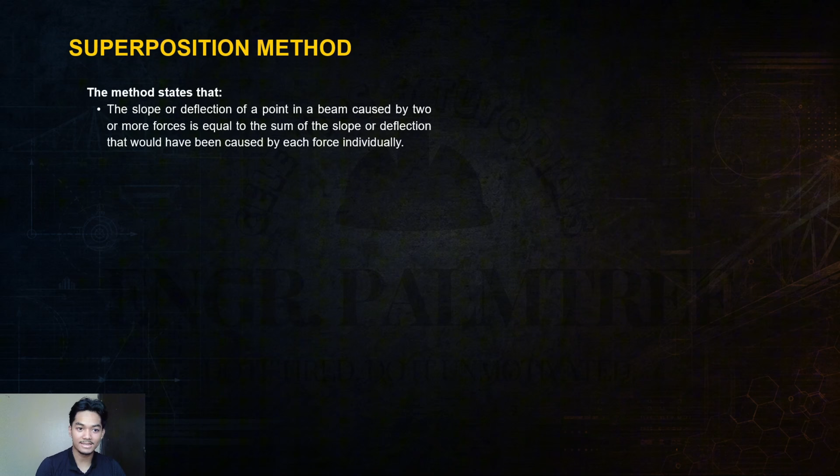So yung superposition method guys, it states that the slope or deflection of a point in a beam caused by two or more forces is equal to the sum of the slope or deflection that would have been caused by each force individually.

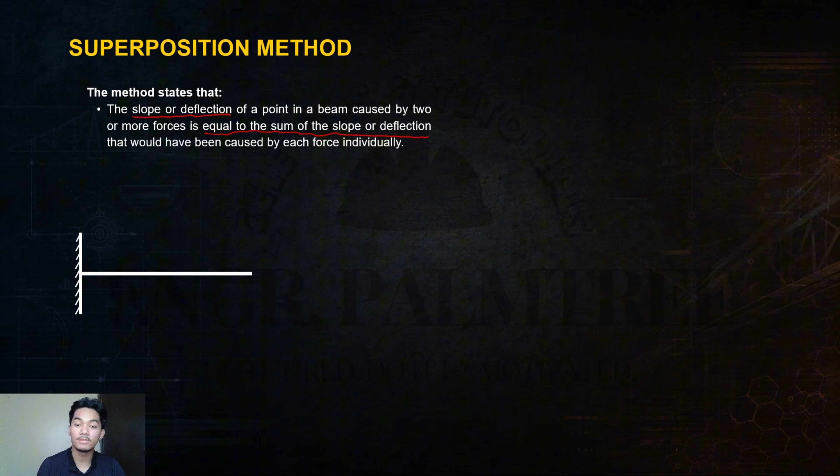So what does this mean? Let's say we have a cantilever beam, tapos there's a distributed load and a point load. Kasi may external forces na tayo, yung beam natin is magde-deflect. So ganito yung deflection guys. Tapos kunwari kukunin natin yung maximum deflection or yung deflection at the free end. Ito yung deflection. Okay? In real life guys, yung deflection ay ang liit lang yan because millimeters yan, pero for discussion purposes, we have to exaggerate it.

So from the superposition method, we can say na yung total deflection nito is just the deflection ng point load at the deflection ng uniformly distributed load. So the slope or deflection of a point in a beam caused by two or more forces is equal to the sum of the slope or deflection that would have been caused by each force individually. Ganyan lang po yung superposition method, guys.

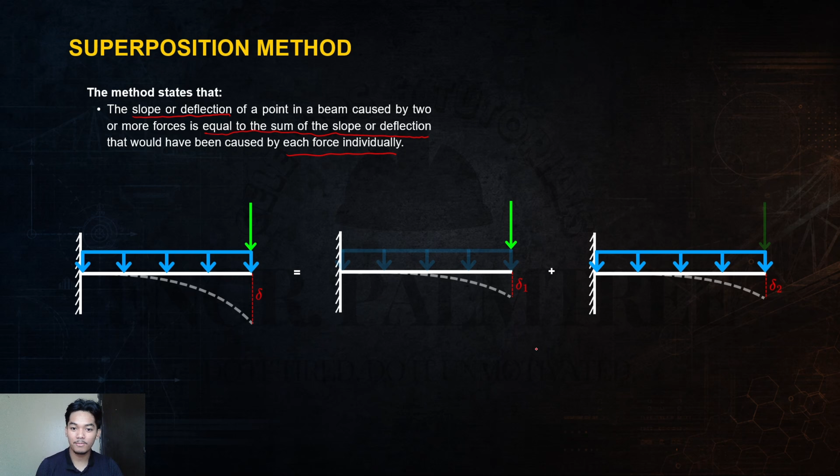Pero ang problema kasi ng superposition method, ang daming formulas. As you can see guys, this is for cantilever and propped beam only - hindi pa kasali dito yung simply supported tsaka yung fully restrained. Pero dito guys, yung minemorize ko lang is itong point load at the free end, itong point load at any point of the beam, itong uniformly distributed load, at itong moment. Yan lang yung minemorize ko for the cantilever or propped beam.

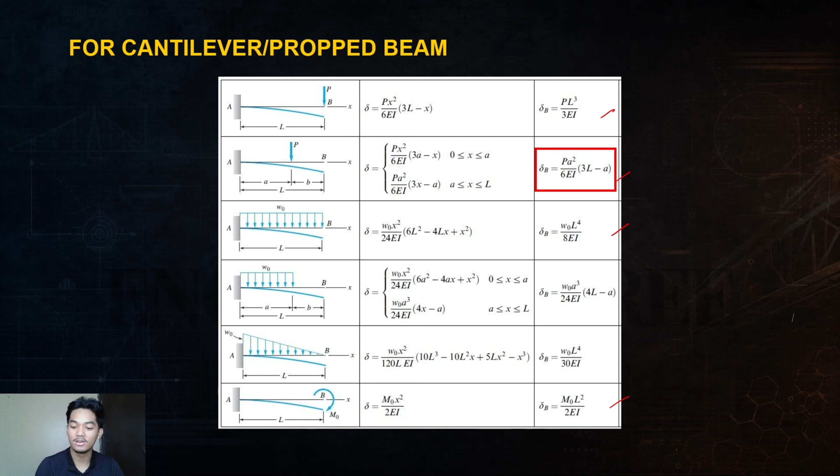Pero for this discussion, we're gonna talk about this formula, yung patotrela. With this patotrela, we can minimize the number of formulas that we're gonna memorize. So the power of patotrela.

Let's say we have a cantilever beam and may point load tayo at any point. Magde-deflect yan as stated from before, magde-deflect yung beam natin. Tapos yung maximum deflection natin is andyan sa free end. And from the formula from kanina, yung deflection natin is patotrela, PA squared times 3L minus A over 6EI. Yung A natin guys, that is your distance from the fixed end papuntang load. Fixed end papuntang load yan guys. If nandito yung fixed end, then dito yung A. Okay, so that is your A.

Tapos yung kaliwa is B - actually, dito na formula hindi yan magagamit. So yung length natin is yung length ng beam. Tapos yung EI, that's your flexural rigidity. I'm sure you all know that. Don't worry, given yan. If hindi given, then your deflection is in terms of over EI. So this will be our main formula - ito dapat yung imamaster natin.

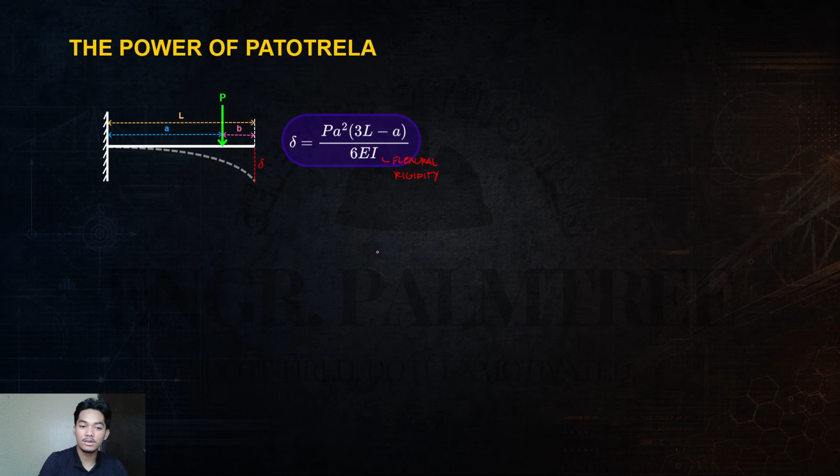So let's say we have a uniformly distributed load. Tapos, di ba, magdi-deflect yan. Ito yung deflection niya. Gamit pa rin yung patotrela na formula para makuha natin yung deflection nito. Ang gagawin natin, guys, is kukuha tayo ng vertical strip. Tapos yung height niya is y and yung width niya is dx - ang liit lang na width niyan, differential na siya. So as you can see guys, kahit saan pa tayo kukuha ng vertical strip,

kahit saan tayo kukuha, constant lang yung height niya - constant always yung height niya. So we can say na yung y natin, which is yung load, itong p, ito yung y, pwede natin yan i-denote as w lang. Tapos, syempre, since may differential strip na tayo, magiging integral na siya. So ganyan lang guys, W yung gamit natin.

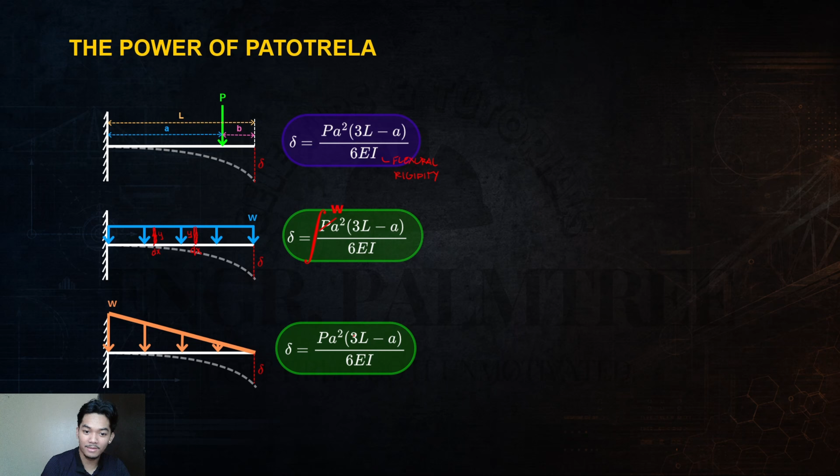When it comes naman to triangular loads like ganito, same effect - may deflection siya and same formula pa rin, patotrela. Pag kukuha tayo ng vertical strip, guys, kukuha tayo ng vertical strip dito. And pag kukuha tayo ng vertical strip dito, we can see na different na yung height niya. At any point of the beam, iba-iba na yung height niya. So hindi na siya constant - di na natin pwede sabihin na yung load natin is W lang.

So what we're gonna use is plot it dun sa mode 3, 2, which is yung linear. So ang mangyayari dyan guys, i-integrate ulit natin kasi gumamit na tayo ng differential strip. Tapos yung P, palitan natin ng A plus BX. Okay? So yung Y natin, since yung height niya is different from each point of the beam, so dapat yung Y natin is naka in terms of X.

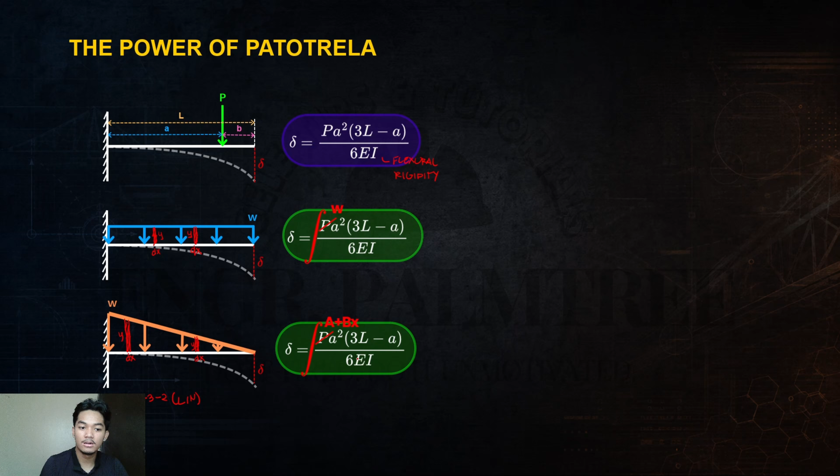This method guys, yung A plus BX, it works on any linear na loading. So pwede hindi zero to, pwede hindi triangular, pwede trapezoidal.

Additional principles guys: if a load is before point of consideration, A is variable. Kukuha tayo ng deflection dito, from this point papunta dito, that's before the load, so A is variable. From dito naman, if the load is after point of consideration, L is variable. You better understand that with our formulas later on.

Pero this is basically all you have to know with the power of patotrela. For uniformly distributed load, gagawin lang nating W yung P, tapos i-integrate natin. For linear loads or triangular loads, trapezoidal loads, i-plot lang natin sa mode 3-2 para makakuha tayo ng equation na A plus BX, tapos i-integrate ulit natin. Depende sa point of consideration natin na kukunin ng deflection, yan yung gawin nating X. If the load is before, A yung variable. If the load is after, L is variable.

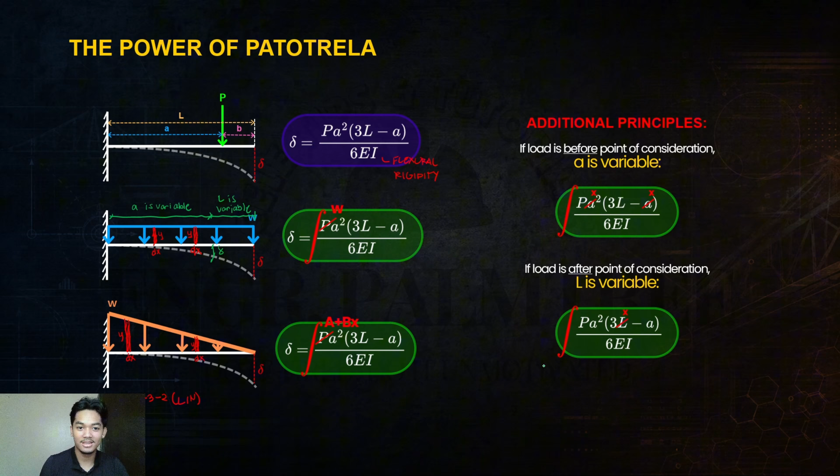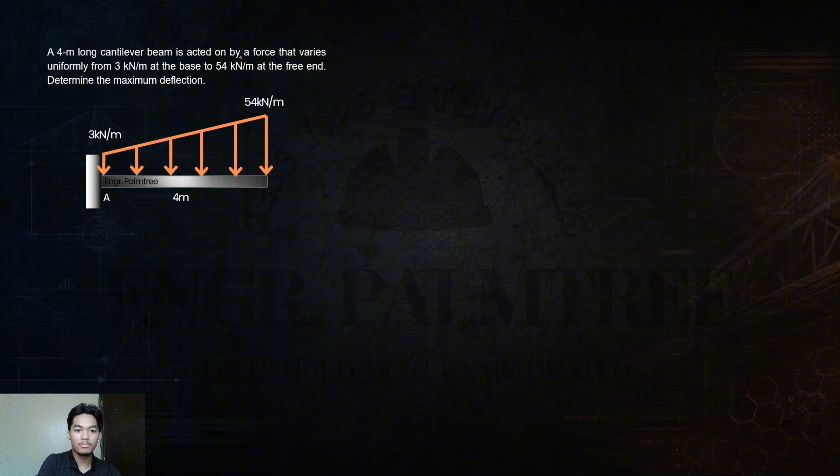Let's proceed with our first example. A 4-meter long cantilever beam is acted on by a force that varies uniformly from 3 kilonewtons per meter at the base to 54 kilonewtons per meter at the free end. Determine the maximum deflection. Remember guys, yung deflection natin for linear loads, triangular loads, trapezoidal loads, is yung papalitan natin yung P ng A plus BX.

Since may loads na tayo dito guys, alam natin na magdi-deflect na yung beam. So yung deflection niya is ganito. Tapos dito, again, for cantilever beams, always yung maximum deflection natin andyan sa free end. So dyan yung max deflection natin.

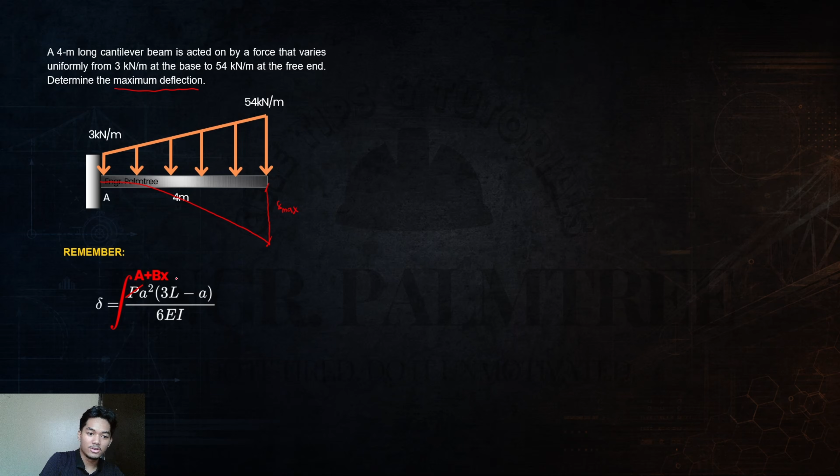Since gagawin nating integration, yung patotrela, kukuha tayo ng vertical strip. Same with our discussion kanina guys, yung height natin at different points of the beam is iba-iba. Kung dito sa base, 3, kung dito sagad sa free end, 54. And somewhere in the middle, iba-iba din yan.

So we have to plot it sa mode 3.2. Pasensya guys, wala pa po kasi akong emulator, so I want you all to use your calculator and sabay lang po kayo. Sa mode 3.2 po, ang makikita nyo dyan is X, Y. Tapos if naka-turn on yung frequency nyo, may makikita din kayo dyan, pero you don't need that for this.

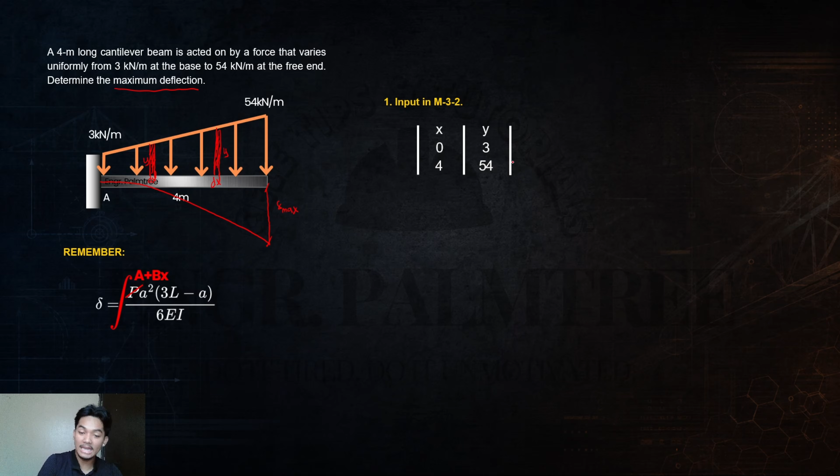At X equals 0, yung Y natin or yung height natin is 3, so yan yung input natin. At X equals 4, yung height natin is 54, so yan yung input natin. Tapos gusto kong gagawin nyo guys is AC or CA, tapos punta kayo sa apps 8.1, tapos lalabas dyan yung value ng A. Tapos punta kayo sa apps 8.2, lalabas dyan yung value ng B. Yung mga values niyan guys, store nyo sa A at sa B, kasi yung makukuha nating equation dyan is Y equals A plus BX. So yung Y natin, yung vertical strip height natin, is naka in terms of X na. So pwede na natin gamitin yung formula natin na patotrela.

So let's calculate na using the patotrela. Again, this is your base formula, and we're gonna input yung P natin, gawin natin A plus BX. Tapos, remember the additional principle guys: since dito, yung deflection natin at the free end, yung load na ginamit natin is before our point of consideration. Since before siya, yung variable natin is yung A, so yung A papalitan natin ng X. Yung L is constant, which is 4 meters.

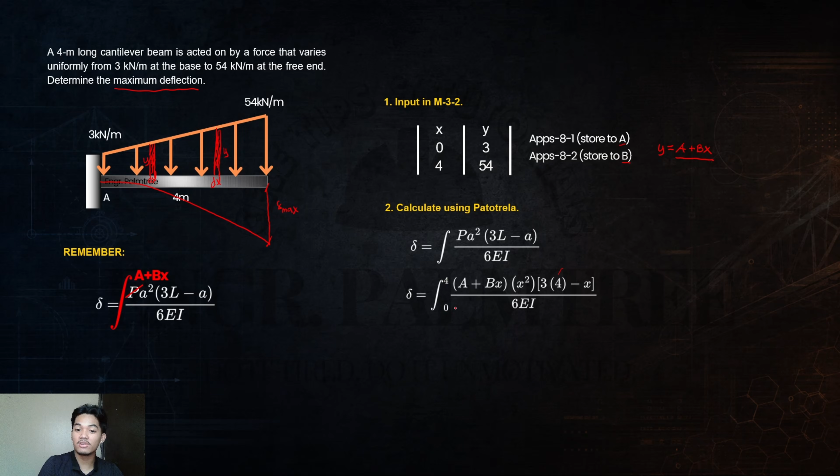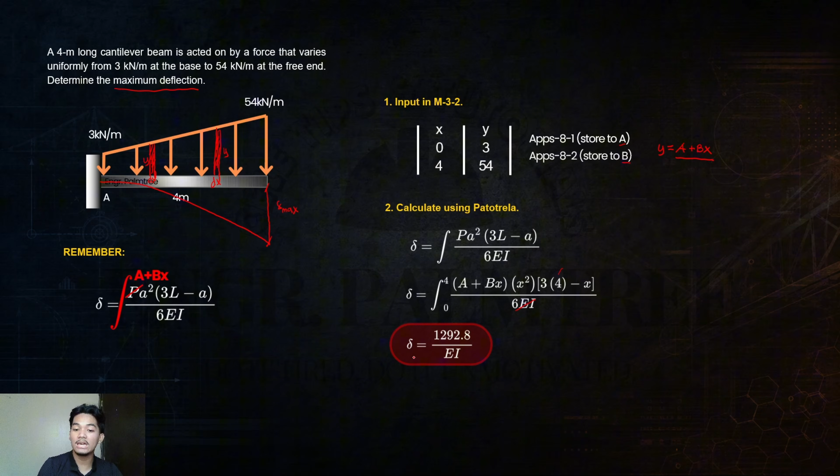Yung lower limit natin and upper limit is yan lang yung sa loads. Since yung load natin nag-start from X equals 0 hanggang X equals 4, so yung lower limit and upper limit natin is 0 and 4. So if you calculate that guys, pwede nyo na to di pansinin kasi di naman yan ma-input sa calculator. Ang makukuha nyo is 1292.8 over EI. So this is what I mean pag hindi given yung EI, naka in terms of over EI yung deflection natin.

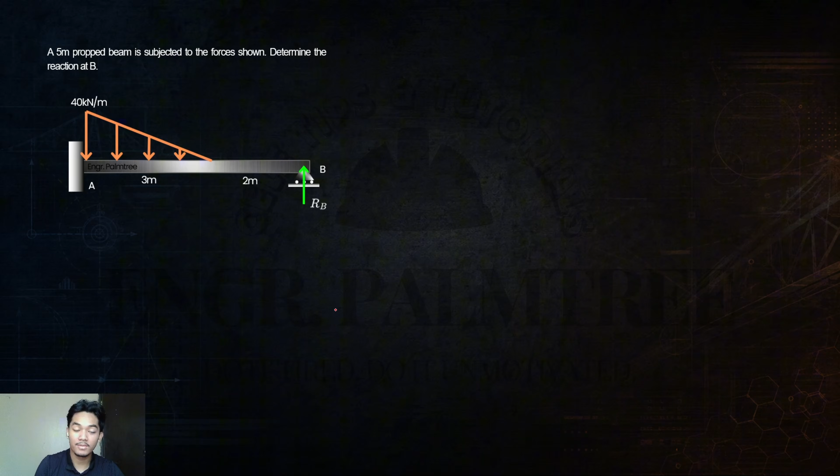Okay, let's have another example. Ngayon, let's answer a propped beam problem. A 5-meter propped beam is subjected to the forces shown. Determine the reaction at B. So propped beam na to guys, so yung deflection natin is hindi na kagaya nung sa cantilever.

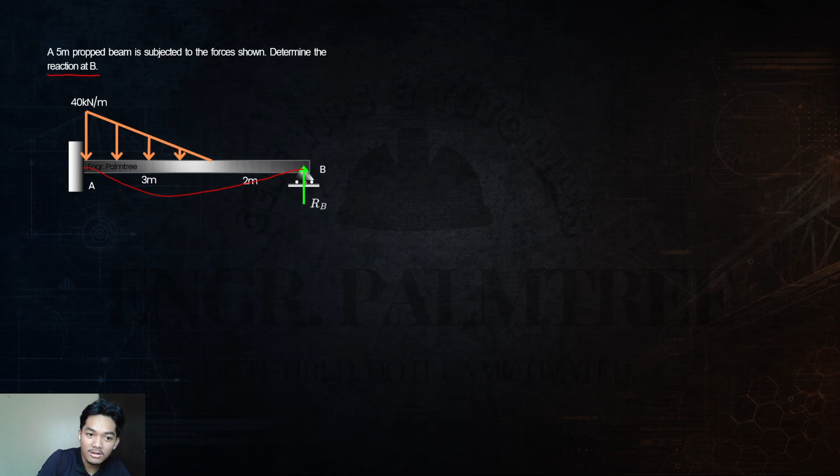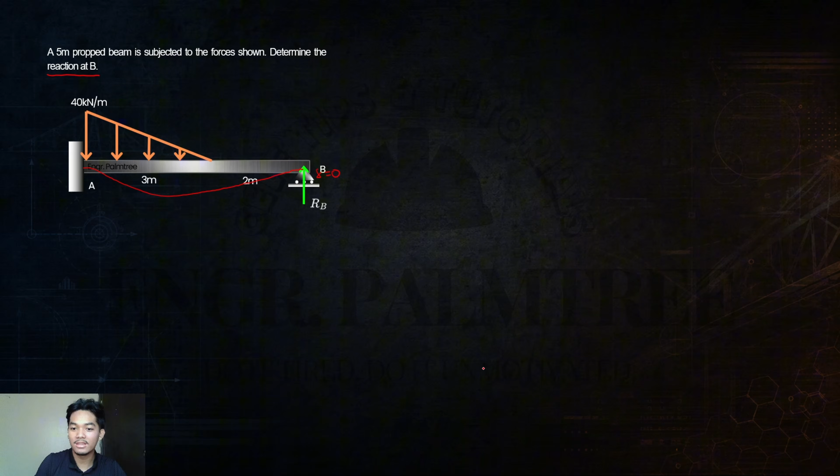Yung deflection natin is something like this na. As you can see guys, at B, yung deflection niya dito, magiging 0 na, kasi may support na eh. Prop beam na siya, may roller support na, so yung deflection niya dyan, at B, 0 na. You better understand that when we continue on with the solution.

Again, remember na yung for linear loads, triangular loads, trapezoidal loads, yung P is papalitan lang natin ng A plus BX. At again, since gagamit na tayo ng integration, kukuha tayo ng vertical strip. At since triangular load to, yung height ng vertical strip at any point of the beam is different.

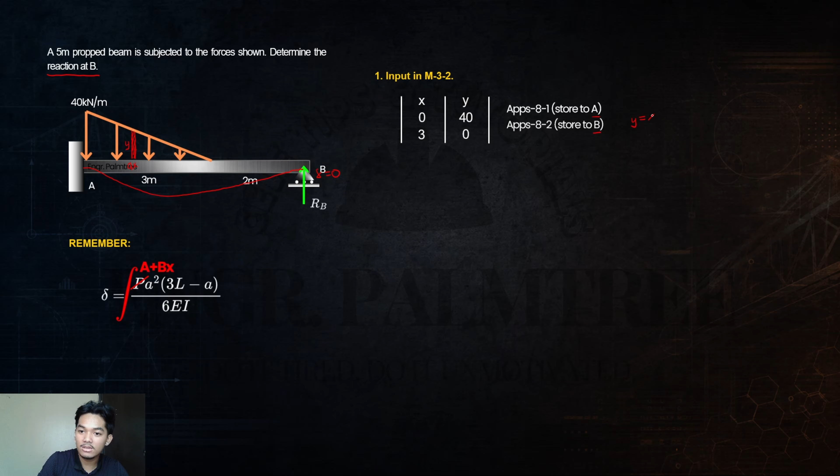So, dapat in terms natin siya as X by using mode 3.2. So, the same like kanina, at X equals 0, yung Y natin or yung height is 40. And then X equals 3, dyan lang yung load, 0 na yung height niya. Kasi triangular load to. So again, press CA, then go to apps 8.1 and store the value to A. Then AC again or CA, go to apps 8.2 and store the value to B. Para yung makuha natin is equals to Y equals A plus BX.

So naka in terms of A plus BX na yung triangular load natin. So next, we have to determine the equations. Kasi dalawa na yung loads natin dito guys, technically, kasi may reaction na tayo at B. So first, let's look at the triangular load. Again, superposition beam, yung deflection at any point of the beam is just the resultant deflection of the effects of each force individually.

So, imagine muna guys na wala na yung roller support dito. So, cantilever beam na siya, di ba? So, yung deflection niya is pag ganito na, pag ganyan na. So, may deflection na tayo dyan, kukunin natin na deflection is basically at the free end. So, gagamitin natin na formula is ito lang, patotrela na A plus BX. Yung P natin, papalitan natin ng A plus BX, yung stored natin na A at B.

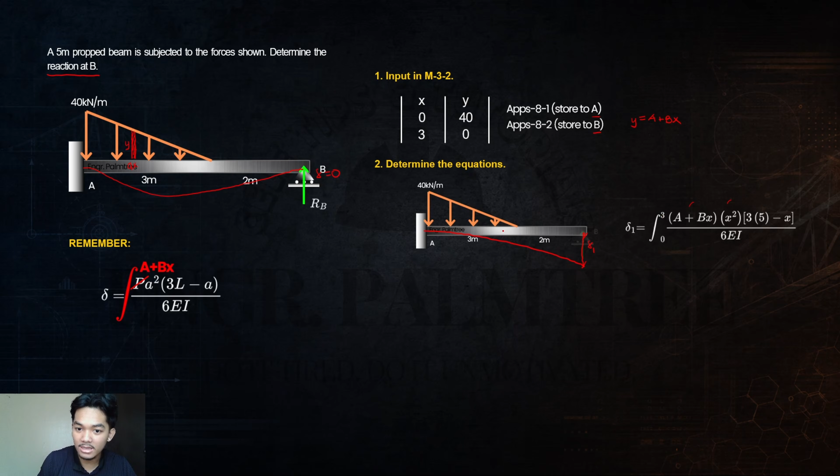Tapos, as you can see guys, again, from our additional principles, yung point of consideration natin is andito. Tapos, yung loads natin is nasa left niya, before niya. So, yung variable natin is yung A, gawin nating X yung A. Tapos, yung L natin is constant, which is 5 meters. Tapos, yung lower and upper limit natin, again guys, sa load yan. So, yung lower limit natin is at x equals 0. Tapos, yung upper limit natin is at x equals 3. Okay? So, if you calculate that guys, hindi pa ngayon.

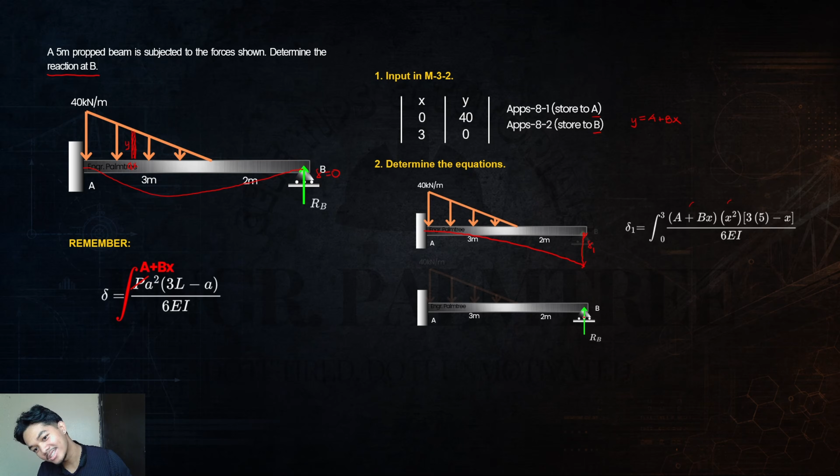Later na. So, as you can see, another load, no, yung point load or yung reaction ng B. So, imagine guys na wala tong support. Papalitan natin siya ng point load. Tapos, sanay kasi tayo na yung load is downward, so gaganyanin nyo yung ulo nyo guys. Tapos, makita nyo, uy, basic lang pala to. Point load at the free end lang pala to ng cantilever beam. So, ang basic, pwede lang yan PL cube over 3EI.

Pero since yung discussion natin is about patotrela, we have to input it in patotrela. And since point load na yan guys, hindi na natin kailangan mag-integrate. So yung P natin is RB, yung A, pag patotrela yung gamit natin guys, yung A is basically just the L, the length. So yung A maging 5, yung L maging 5. So that's your equation 2. This is your equation 1, and this is your equation 2.

And as you can see guys, if ito yung load natin, yung deflection is paganto, paganto na yung deflection natin. So, opposite na siya nung unang deflection diagram natin. And basing dito na figure, basing dito na deflection diagram, we know, di ba, na yung deflection at B is equal to 0. So, dapat yung deflection ng triangular load natin and yung deflection ng reaction natin is equal para maging 0. So, if we equate the equations, dapat yung first equation natin, if we minus natin sa second equations, magiging 0 yan, which is yung deflection natin at B. Or pwede din na gawin lang nating equals yan, pwede natin gawing equals tas hindi na natin to pansinin.

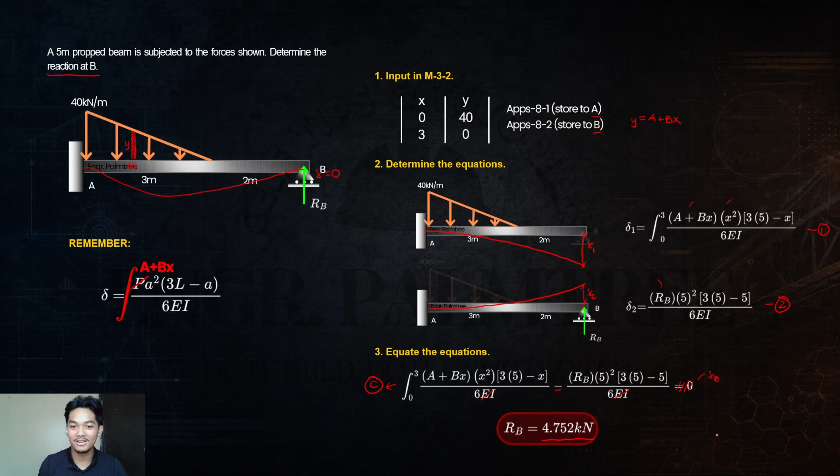So, ganyan lang, guys. Pagkuha ng yung superposition method, magagamit nyo yan para pagkuha ng reaction ng prop beam. Pagkuha ng reaction, if nakuha mo na yung reaction ng roller support sa prop beam, then makukuha na muna yung mga reactions ng fixed support. So, determinate na siya. So, isa yan sa power ng superposition method.

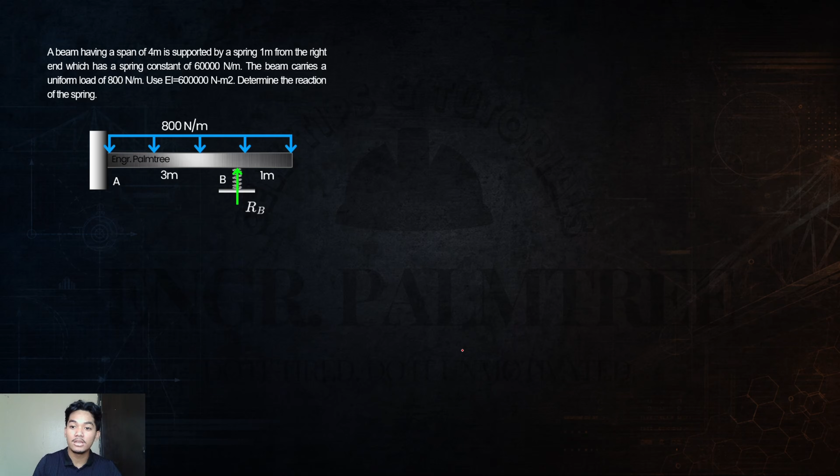For last example, we're gonna be answering another prop beam. Pero dito talaga maa-apply natin yung additional principle na dinidiscuss ko. So, let me read the problem. A beam having a span of 4 meters is supported by a spring 1 meter from the right end, which has a spring constant of 60,000 Newton per meter. The beam carries a uniform load of 800 Newton per meter. Use EI equals 600,000 Newton meter square and determine the reaction of the spring.

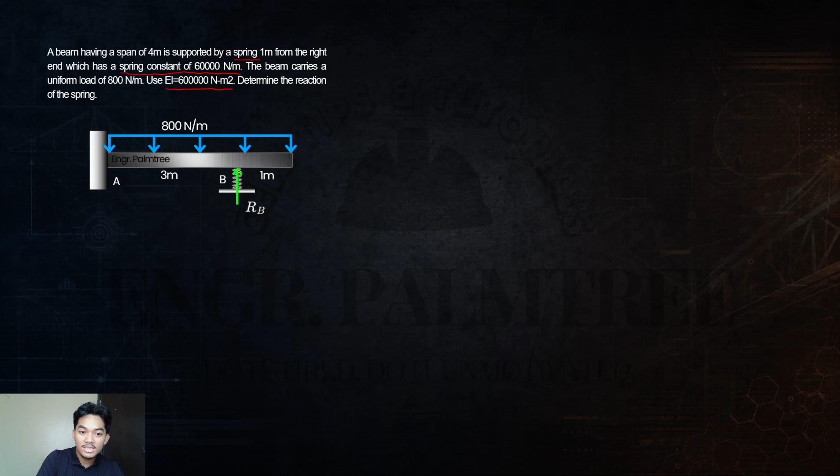So, from this beam, guys, may spring at B. Tapos, may reaction yan. Tapos, since spring kasi yan, guys, nagko-compress yan, di ba? Nagko-compress yan. So, yung deflection natin is something like this. So, may deflection tayo dyan. May deflection tayo kasi spring yan.

Hindi yan rigid, unlike roller and pin support. Spring yan, so may compression. So, remember.

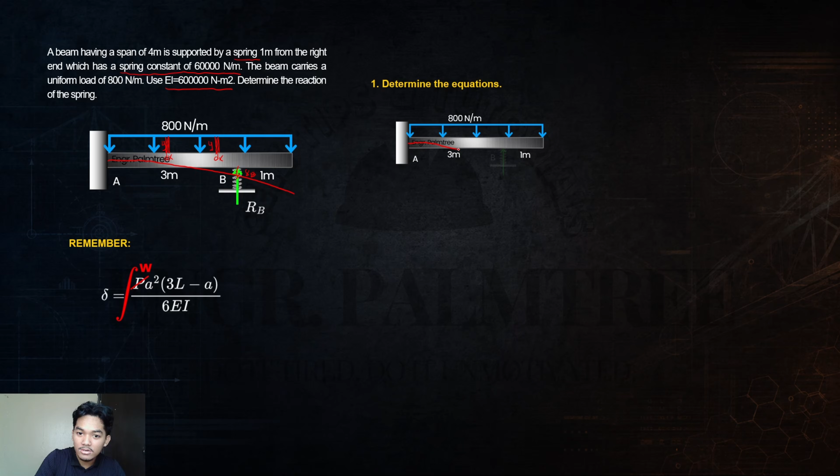So yung W natin is just 800. Let's determine muna the equations, no? Again, superposition, so we're gonna break each force individually. So for our first loading, which is a uniformly distributed load, if wala tong spring dito, imagine wala tong spring dito, yung deflection natin is ganito. So yung kukunin natin na deflection is dito. Tapos from our additional principle, this is where we apply both additional principles.

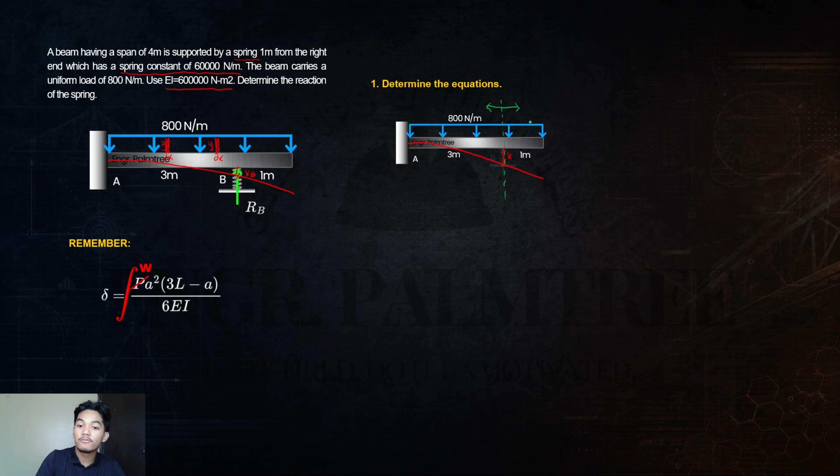Dito, let me use a different color. Dito yung point of consideration natin. So may load tayo before the point of consideration and may load tayo after the point of consideration. So yung gagawin natin, guys, for our deflection equation, yung una natin i-consider is yung before.

So sa before, since again, ito lang yung gagamitin natin, yung P is just W, so yan, 800. Tapos, since before siya sa point of consideration, yung variable natin is yung A, so yung A, yung gagawin nating X. Tapos yung L is constant, 3 meters yung L. Tapos yung lower and upper limit is from 0 to 3 lang, kasi yan lang yung kinoconsider natin na loading. Tapos plus tayo, plus, since same lang man sila downward.

Sa second equation, yung W natin A ulit. Pero since after na siya ng point of consideration, yung variable natin is yung L na, so yung L na yung papalitan natin ng X. Tapos yung A natin is constant na, ito yung A always, yung 3, diyan hanggang sa point of consideration.

Tapos i-calculate nyo lang yan guys. Yung EI, I want you to store this to E. Store nyo yan to E. Tapos input lang to, ang makukuha nyong deflection is 0.0285 meters. So that is the deflection dito at B due to the uniformly distributed load.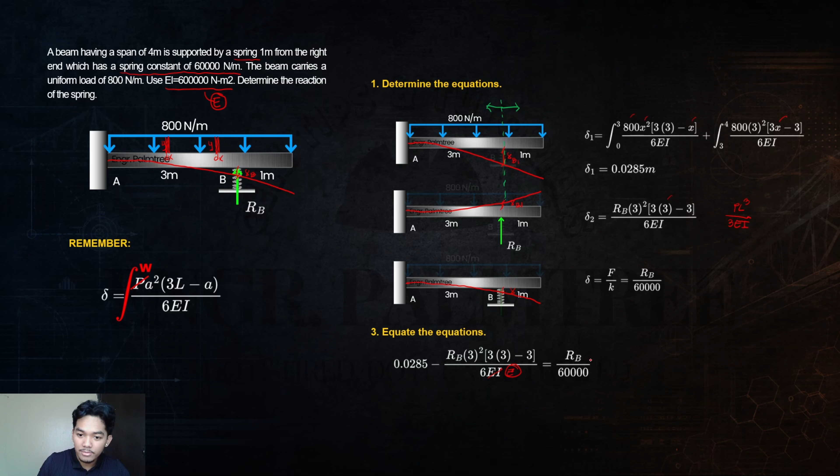And I'm hoping na-gets nyo talaga itong principle ng before and after loading, kasi super important yan guys. Baka may ma-encounter kayo in the future na ganyan. Pero yung board exam talaga, guys, mabait naman si Ma'am Praxi, so baka hindi na. Pero much better pa rin talaga if gets na.